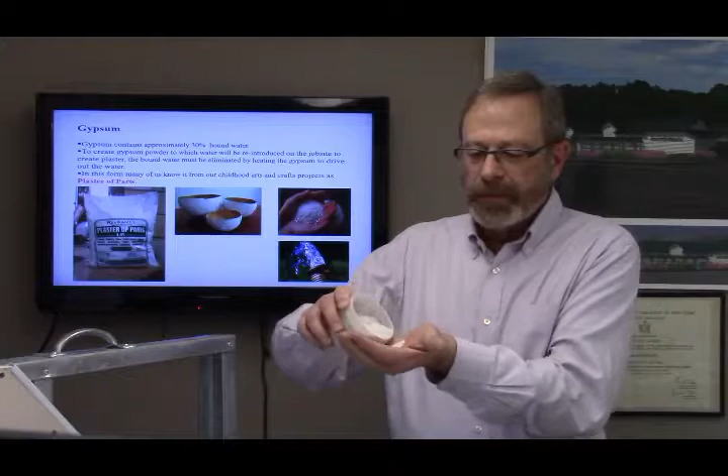Here's a sample of gypsum in its powdered form. We're going to mix that with water in the right proportion for applications on the job. The capacity of gypsum to contain a large amount of bound water is an instance of a material's intrinsic characteristics, as we mentioned in the last module, possessing unique attributes which make it an appropriate material choice to fulfill the needs of a particular construction task.

In the case of gypsum, the capacity to hydrate and dehydrate, that means absorb water and shed water, is gypsum's unique attribute. When gypsum is exposed to fire, the bound water is released as steam. This provides a fire barrier until the water is completely eliminated. After the water is exhausted, the gypsum residue remaining continues to act as an insulating barrier to flames.

This is what makes gypsum an appropriate material choice for partitions. In being the partition, the gypsum is also there as fire protection of the framing within those partitions. Without this protection, structural materials might begin to fail quickly during fire incidents. We will be discussing this idea in a future module on fire safety.

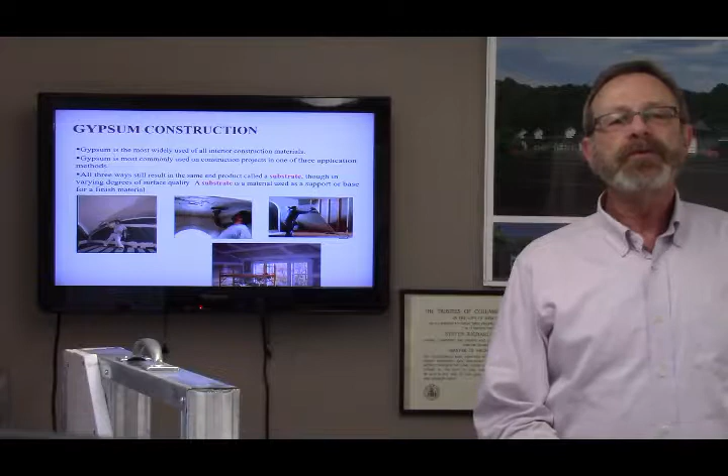As a substrate, gypsum provides not much more than a support for the finish-facing material, be it paint, wall covering, paneling, or the like. Gypsum is available as boards in various thicknesses, sizes, surface finishes, and formulations specifically designed for particular uses. Here we see gypsum in the board form, rectilinear, solid, 4x8 boards, though they do come in different sizes. Because gypsum boards come in thin, flat, wide, and long, the board form of gypsum is most conducive to creating rectilinear spaces and geometrical enclosures, not curving, sinuous, or abstract shapes, though slight curves or bends are possible.

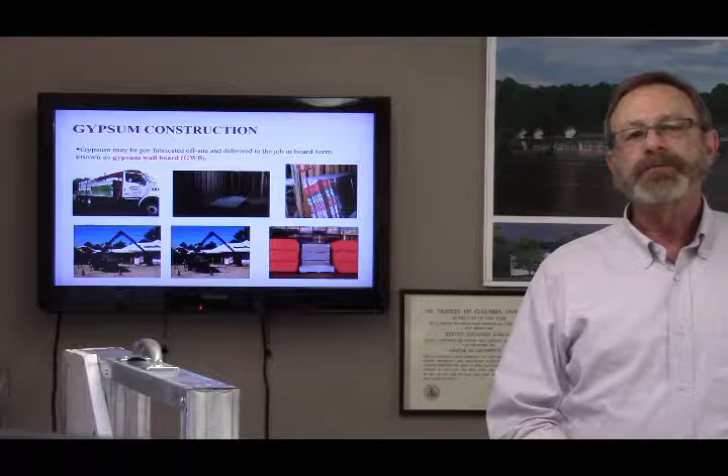Gypsum plaster is the superior substrate for accepting finished materials such as paint. The surface smoothness of the substrate might display through the finished material. I'll explain this thought in more detail in a little while.

Plaster veneer is an alternative to and combination of the full plaster system we just saw and the gypsum wallboard system we've already talked about. Many of the labor and installation expenses of a full plaster system are eliminated, and while the resulting substrate is not as good as that of a full plaster system, it is still superior to a gypsum wallboard finish.

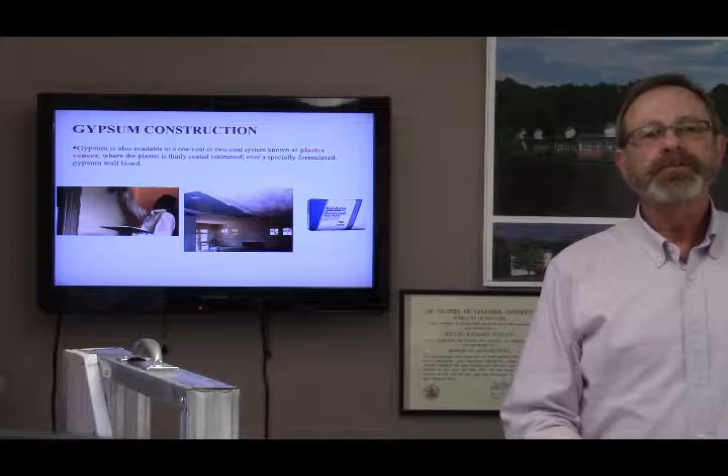Materials comprised of gypsum provide many advantages for use. Gypsum is hard and durable. That means gypsum construction takes abuse pretty well. It is used to create surgical and orthopedic casts.

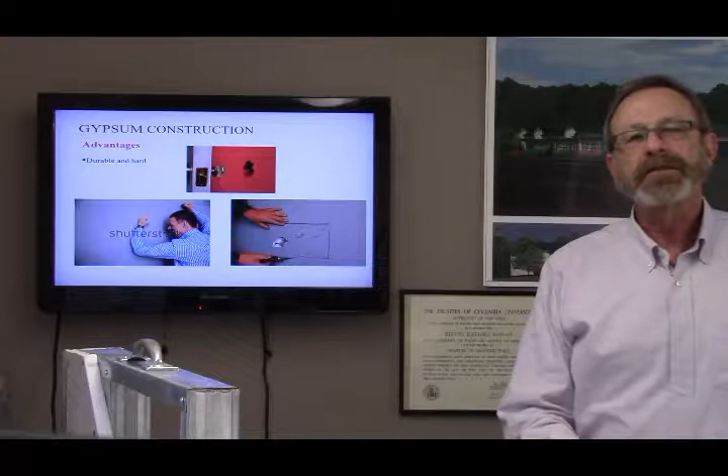In an intimate restaurant, this may not be so welcome, while in an event space, this might be helpful for reaching the back row. Fast installation, that is, gypsum is manageable by a single installer, doing several installation steps simultaneously, or at most, just a few installers for larger pieces.

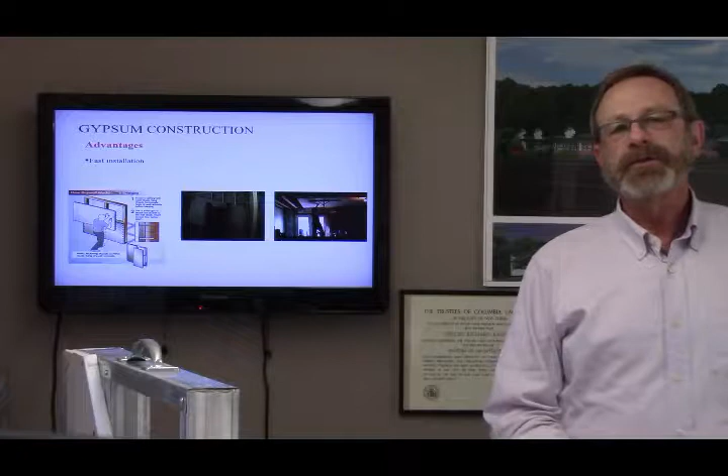And gypsum is easy to repair. Small damage can be easily and quickly repaired with no particular skill set needed. Gypsum is lightweight, again manageable by a single installer or at most just a few installers for larger pieces. Gypsum is inexpensive, especially attractive to tight budgets while providing durability and a more than acceptable appearance.

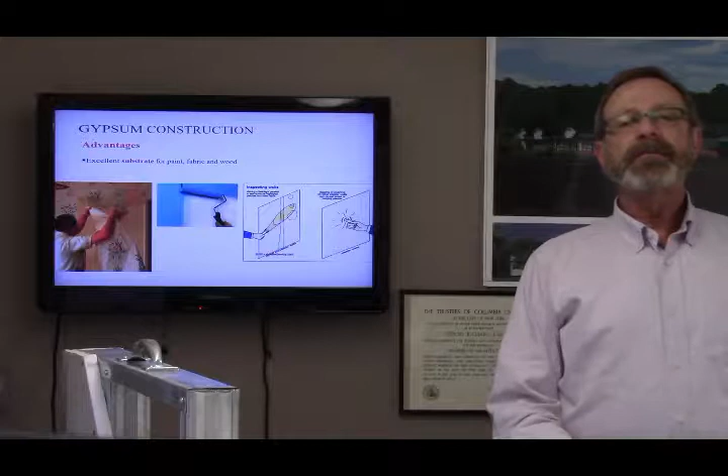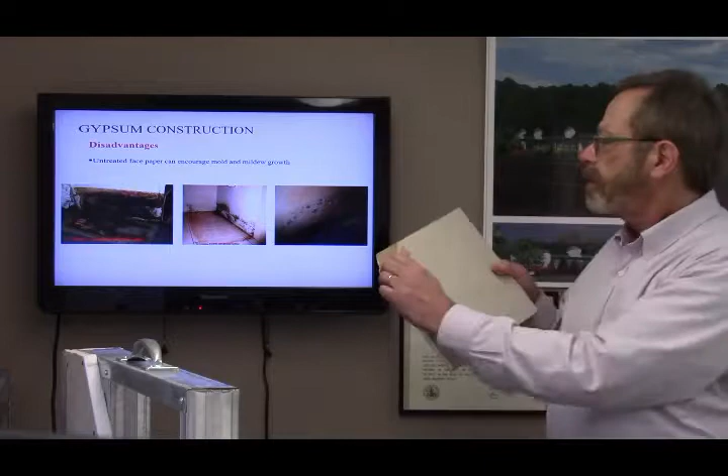Finally, gypsum is an excellent substrate. Its worth as a substrate depends upon the particular performance expected. A material may have those advantages, and it must certainly then well have its disadvantages. So therefore, we can say that gypsum is not resistant to water. It supports mold and mildew growth. The surface paper of the gypsum wallboard - you can see here, there's paper on both sides of the gypsum.

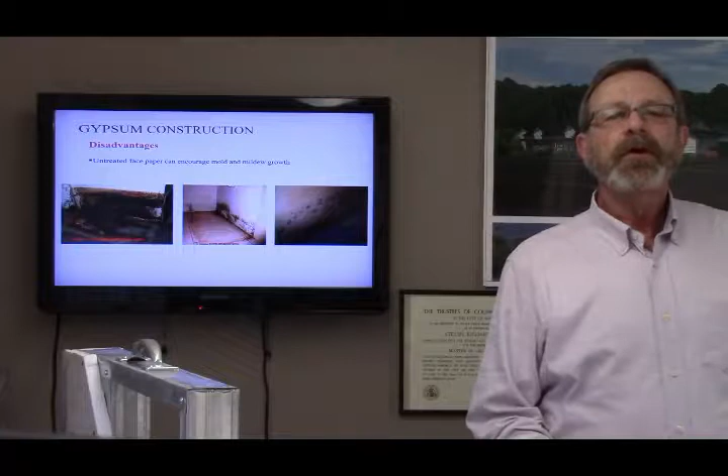The surface paper of gypsum wallboard is available in a variety of types, the choice of which depends upon performance expectations. There are paper finishes which inhibit the growth of mold and mildew in wet applications, finishes which hold gypsum residue in place for increased fire resistance protection, finishes for water repellency, and others.

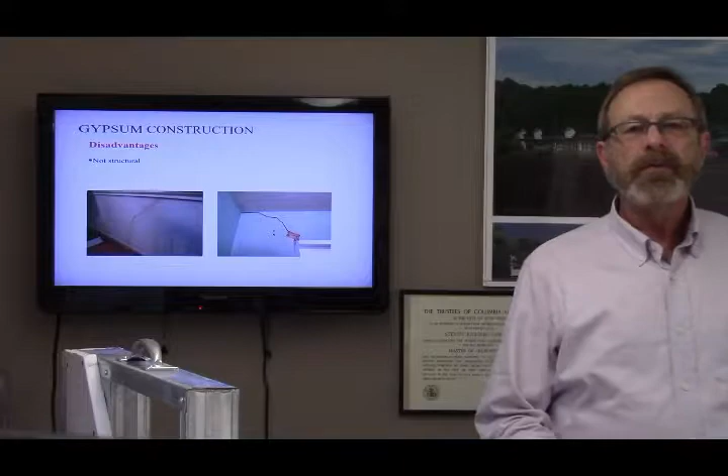Gypsum is hard and durable, which is not to say that gypsum is a structural material. It is not. However, gypsum construction systems do need a supporting framework on which to be mounted, which is what we'll talk about when we discuss metal studs and wood studs.

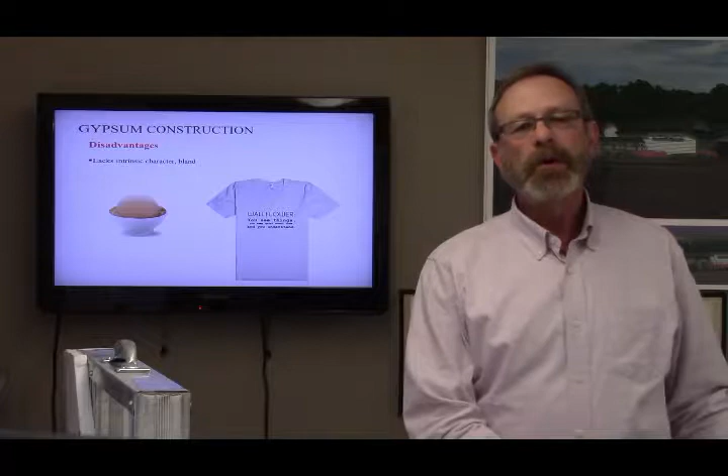Gypsum reflects sound. The hard surface of gypsum promotes sound reflection off of it. This can be an unpleasant consequence which needs to be addressed, or a welcomed consequence which might be exploited. Gypsum lacks intrinsic character; it contributes not more than a surface on which to apply a decorative finish.

There are some benefits to our environment which the use of gypsum as a building component provides. One benefit is that it has little negative impact upon our environment. Gypsum is not a contaminant which harms us or our children. Hopefully it will not be discovered at a later date to harm our children's children.

We are all familiar that there have been useful materials in the recent past which, once thought not harmful, have now been proven to be toxic and carcinogenic, such as lead and asbestos. Gypsum is not poisonous and is used as a primary ingredient in toothpaste.

Gypsum is recyclable. You typically find on a construction site where there's demolition going on that there's a pile for used wood, scrap wood, a pile for scrap metal, and a pile for gypsum. Here's a drywall pile being readied for transport for recycling, to be used again as gypsum board.

I will say that unlike the other materials, metal is a material that you recycle and you can actually get paid for that metal. It's that valuable.

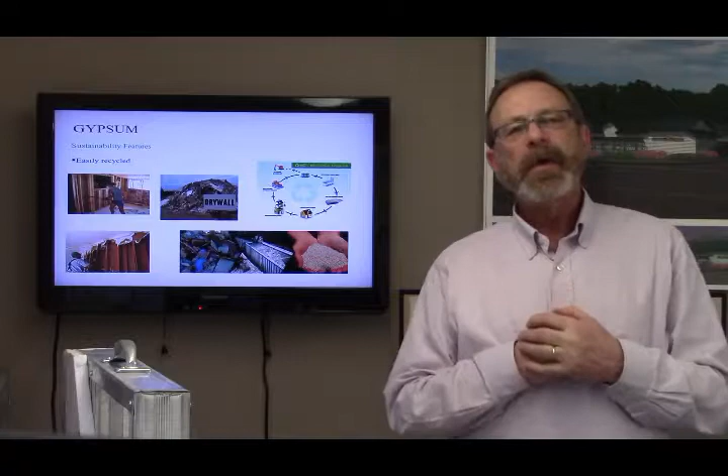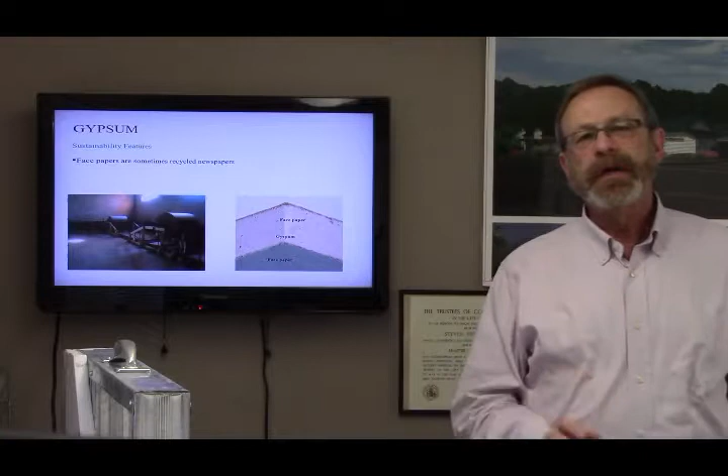The facing paper, which I just showed you, is used on the gypsum surfaces again and is also used for other recycled paper stock, such as newspapers. There is no supply shortage of gypsum currently, and none expected going forward.

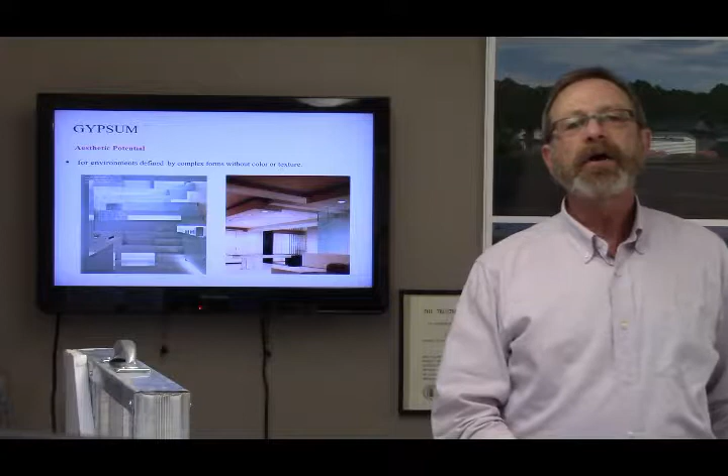I proffered earlier that gypsum lacks intrinsic character, that it is plain vanilla, bland, flat, a background material, a wallflower, just for dressing up. But looking at this slide, and this slide, one could actually argue that its dullness is a good thing, right?

It is a background that can use the planes created from the material as demonstrative of forms and spaces into which our other, perhaps more impactful design features are brought to prominence.

Interior finishes encompass all materials and surfaces that can be seen or touched. The choice of materials and the methods of construction should be based on the function of the space, the anticipated volume of traffic, acoustical effects, fire resistance ratings, aesthetic appearance, and of course many more things.

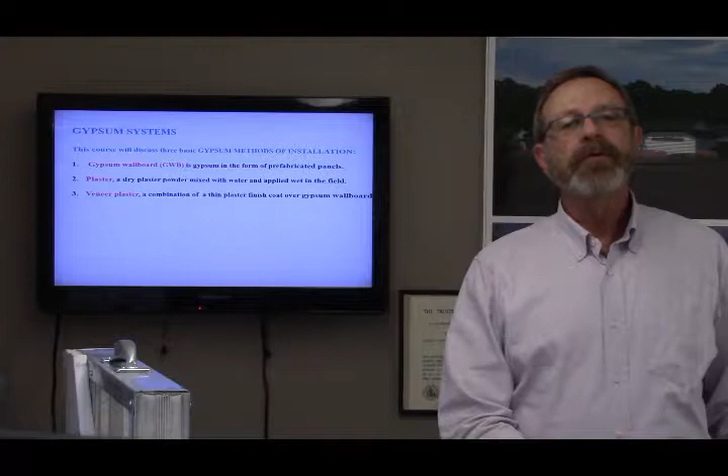The prevalent application of gypsum is as boards, so I'm calling this our first method. Gypsum board is less expensive, requires less labor, less skilled labor, and less time than any other appropriate alternative substrate, were there in fact a comparable substrate on the market.

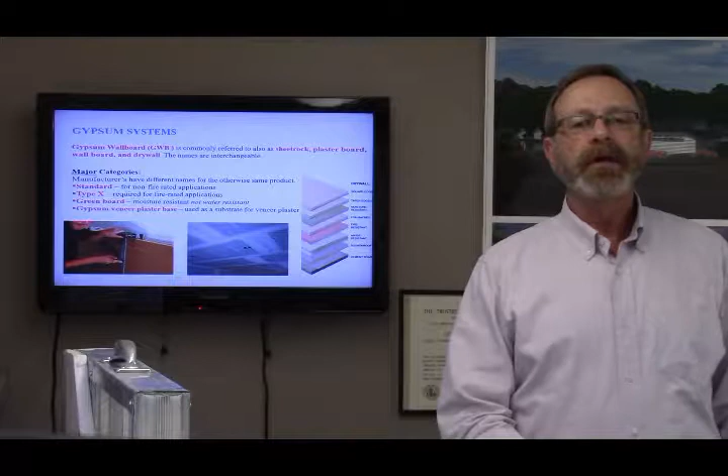In different areas of the United States, the terms drywall, gypsum board, gypsum wallboard, plasterboard, and sheetrock are synonymous with one another. In fact, sheetrock is actually the trademark name of one company's gypsum wallboard product.

We can see from this slide that GWB, gypsum wallboard, comes in different face paper colors. Each color denotes a particular characteristic which makes that particular sheet suitable for an application.

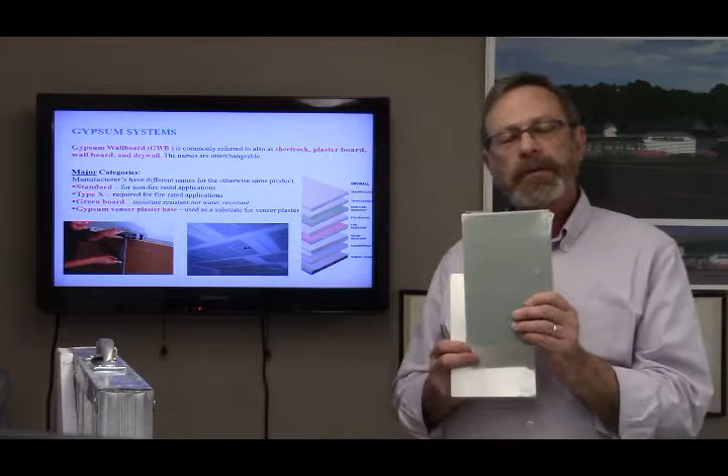So here we have green. This is specified as moisture resistant board, substituted today in most part by something called cementitious backer board, which is a cement type board used now more prevalently in wet or moist locations.

The white is just a standard piece of gypsum board. We'll be talking about some of the particularities of the other colors as well going forward.

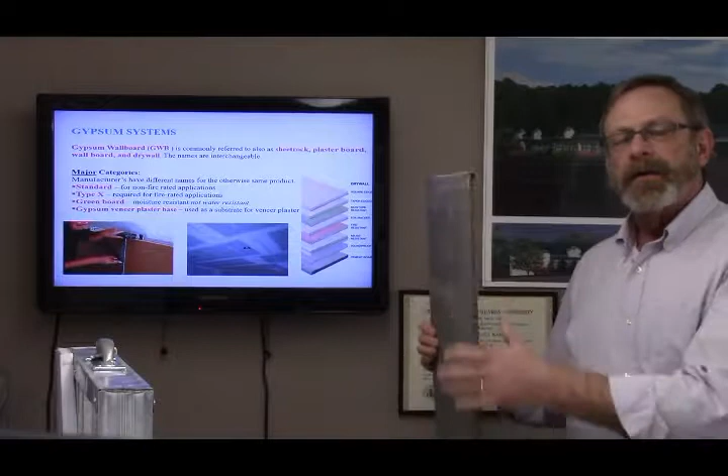This is a sample off the job of cementitious backer unit, CBU. You can see it's concrete or lightweight concrete with fiber mesh to hold it together. It's much more impervious to water and moisture than even the best moisture resistant gypsum wallboard.

It's used in areas primarily where you have showers or bathrooms and are going to be applying tile to the face. Also called Durock or Wonderboard.

Sheets are normally 4 feet wide and 8 feet long, but they are available commonly in lengths up to 16 feet. Gypsum wallboard sheets are available in increments from 1/4 of an inch up to 1 inch, with 1/2 inch, 5/8 inch, and 3/4 inch being the most popularly specified.

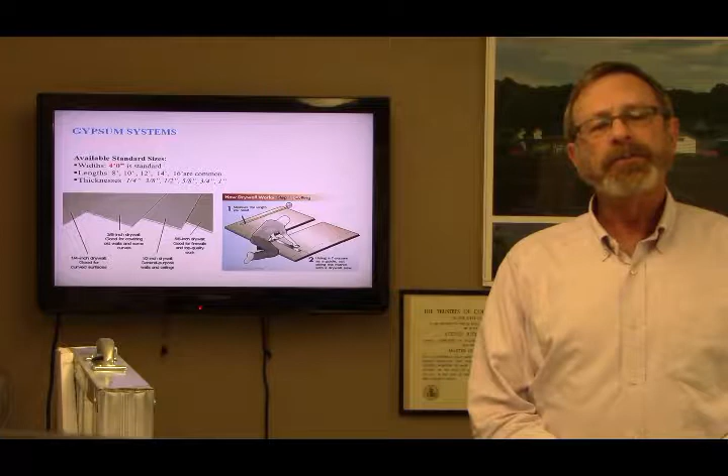The thickness of the GWB that you will specify for your projects will depend upon the task it's meant to serve, whether it be for fire rating or sound attenuation, or just using a thin sheet to cover some irregularities on a former partition.

The larger the sheets, the fewer joints there will be once installed, and the reverse is also true. The smaller the sheets, the more joints there will be once installed. Each exposed joint between wallboard pieces will need to be concealed and finished. So ask yourself this: is it more efficient, productive, and result in higher quality to use larger boards or smaller

boards? Large boards require 2 or 3 workers to install, but will have fewer joints for finishing, which in turn will result in a more perfect surface finish upon which to apply the paint. Smaller boards require 1 worker to install, but will have many more joints for finishing, which in turn will most likely result in a larger number of surface imperfections over which to apply the paint. Think about this conundrum while we discuss the actual methodology for gypsum wallboard installation.

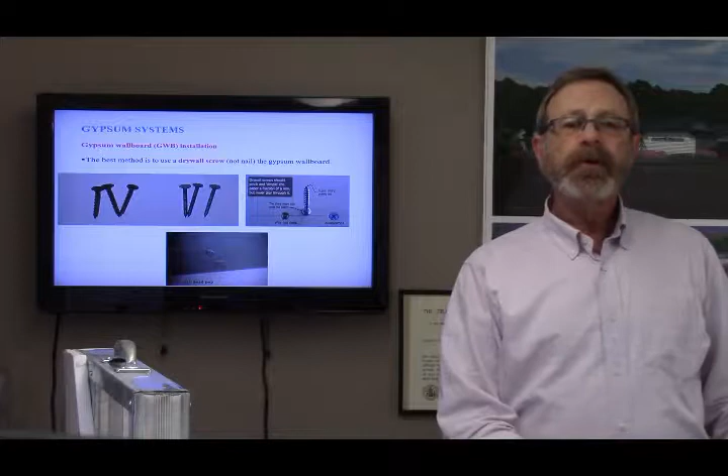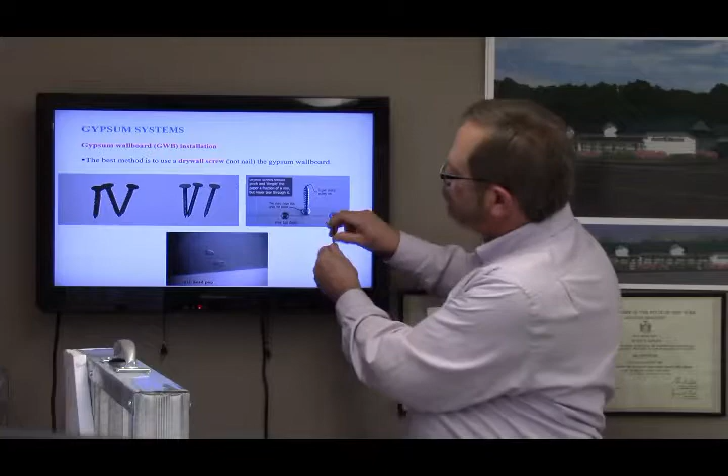The installer, referred to on the job as the sheet rocker or rocker, uses screws, not nails, when installing the gypsum wallboard. It is the threaded shaft which makes the difference. Let me show you an example of some sheetrock screws. Hopefully you can see that these are threaded. They create more friction to hold the material better to the wall structure behind the gypsum.

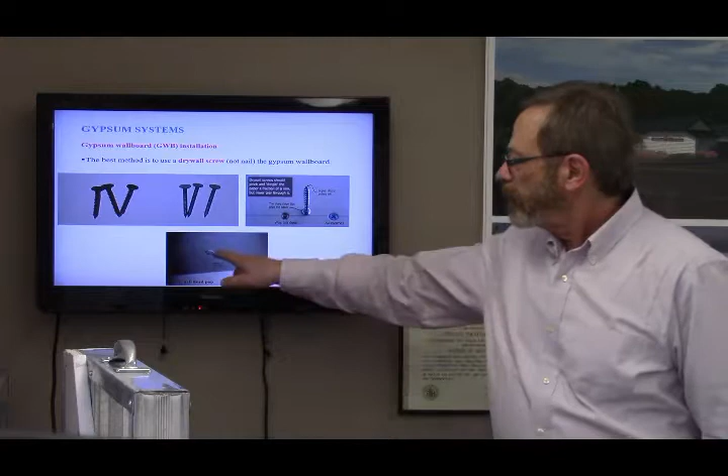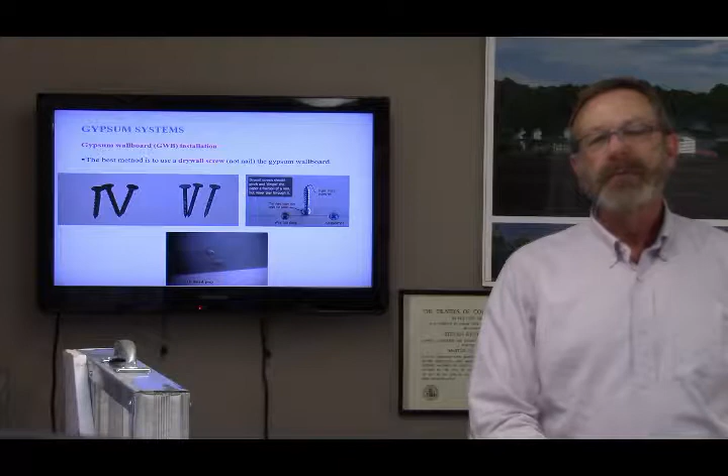Nails, on the other hand, are smooth shafts without that added threaded resistance, so they could pull out much quicker and more easily, or the screw is less likely to become loose and back its way out than a nail with a smooth shank. Here you can see a nail pop. These are screw holes, somewhat recessed, that will then be covered with a material for finishing. So specify screws, and if you see nails being installed, stop the job and settle the issue. The client's best interest is your responsibility.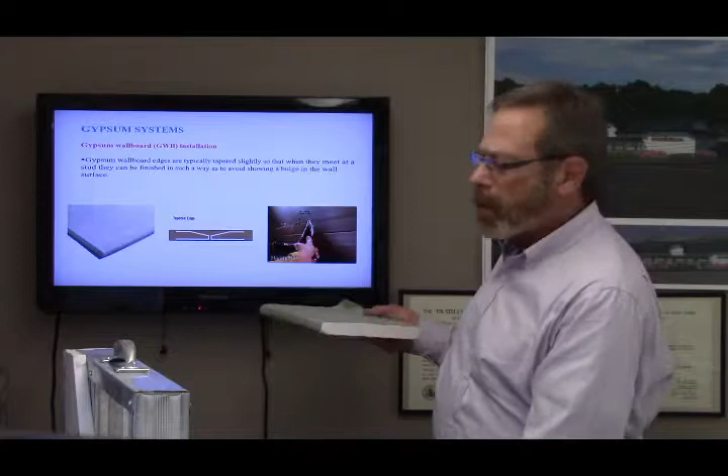The long edges of wallboard are typically, though not exclusively, supplied tapered with a beveled edge. The taper width is about 2 inches. You can see in this slide, and hopefully in these examples, that when you butt up 2 pieces of gypsum wallboard, there's an area adjoining the joint that is somewhat depressed. Into that area will be the filler or the spackle and a piece of tape that will close that off and make it smooth between the adjacent boards.

This tapering at the long edges allows for the tape and joint treatment to be applied, resulting in a finish that should be flat, smooth, and monolithic. I emphasize should because a good taper spackler can make even a poorly done installation job look fine. Always insist upon the best taper spackler for this stage of your construction project.

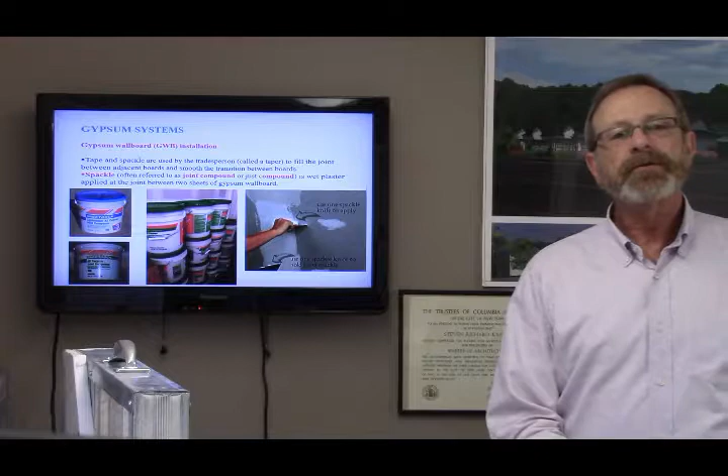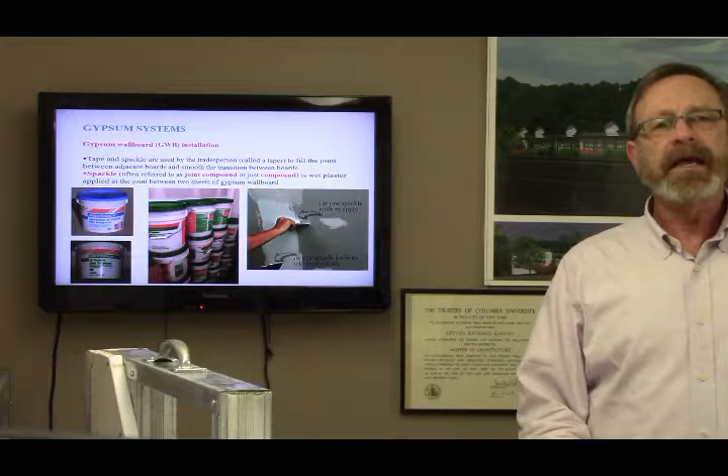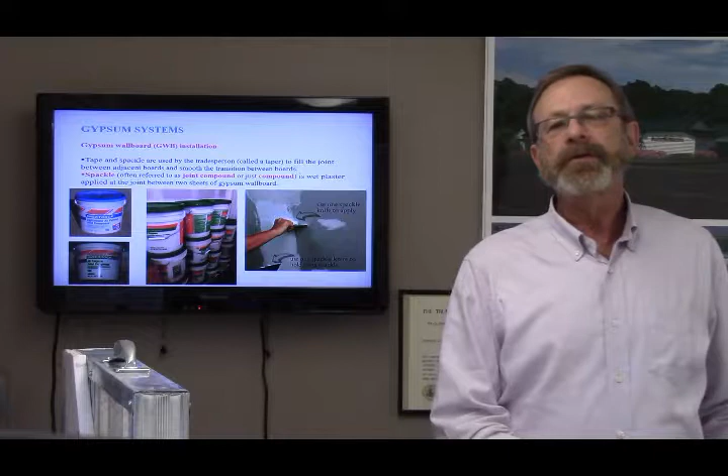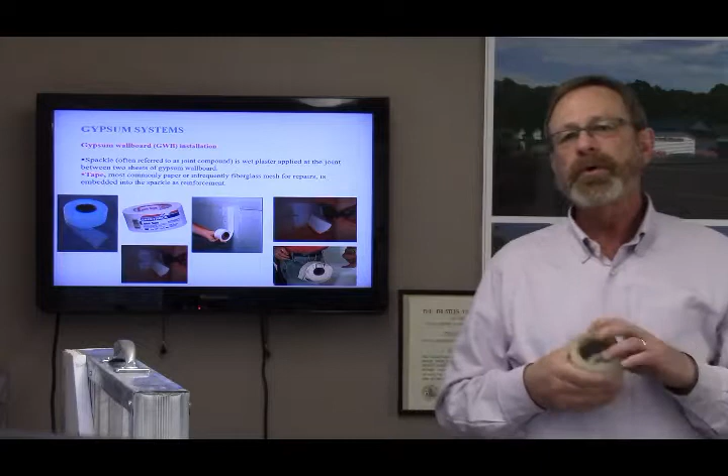lid, amongst other types. The tape part of tape and spackle comes only in either fiberglass mesh form or paper form. This is a sample of the mesh form. It's got a slight adhesive on one side and so can be self-supporting for a short while. This mesh type is reserved primarily for small repairs because of its inferior stability. Paper tape is the most common for all other uses. Both come in rolls, as you see.

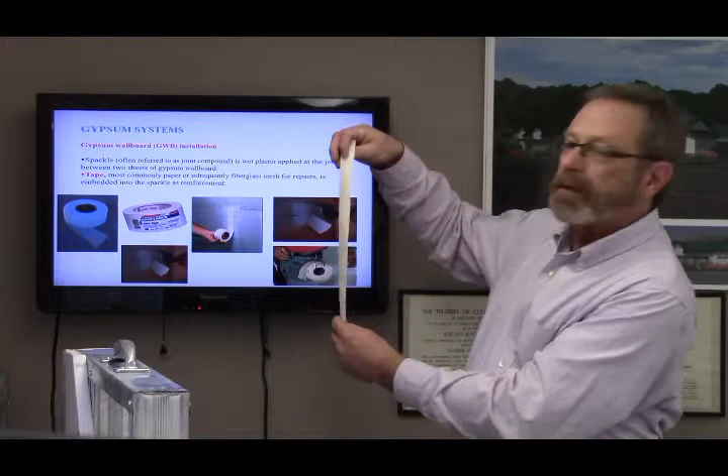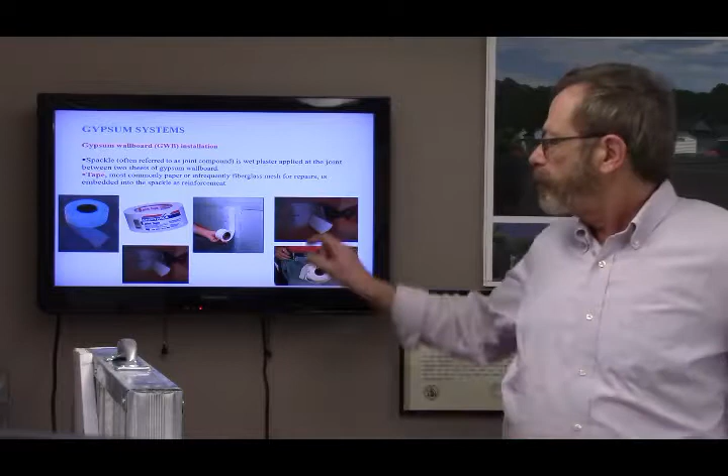Paper tape has a crease down its center, which can be folded to easily place the tape into a corner. There's a crease in the center. You could just fold it like that and have it ready to put into a 90-degree corner. A first application of compound, or as I said, mud or spackle, is typically applied to all joints using a wide 5-inch spackle knife. The knife will cover the 2-inch spacing of the feathered edge of each adjoining board.

The tape is then placed to cover the joint and is pressed into the mud. Another layer of compound is applied, feathering the outer edges. After drying, the compound is sanded and a third coat is applied, with the feathering extending beyond the previous coats. All screw holes are also filled with joint compound and sanded smooth as well. Sanding should be limited only to the area that has been coated with compound, because sanding the paper layer will result in a roughness that may be visible through a paint finish.

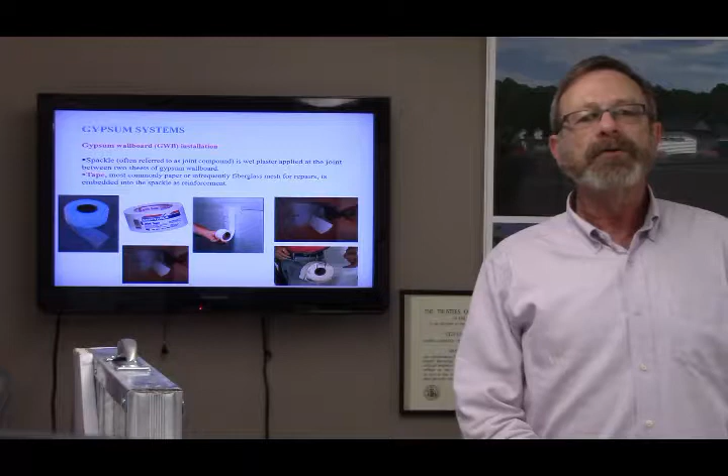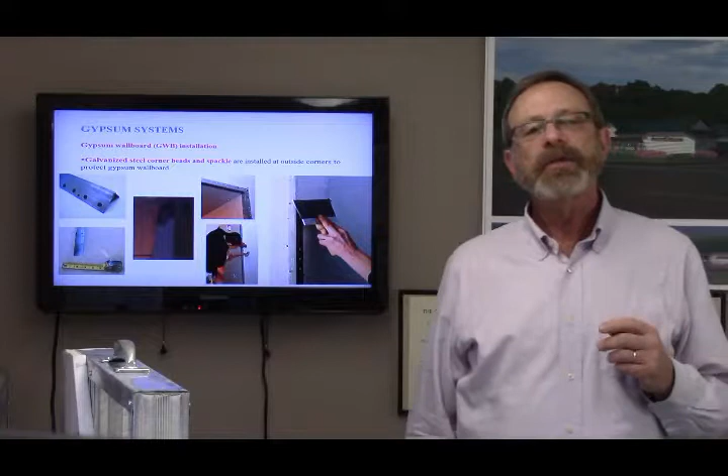The appearance of these rough surfaces blemished by sanding, in contrast alongside the normal paper finish surface, is what many observers find objectionable once the paint is dried. And then it's too late. Due to the vulnerability of outside corners to damage by human activity, there is a reinforcement available to install which protects and delineates a crisp 90-degree edge at the meeting of 2 pieces of wallboard.

This accessory is called a corner bead. Here's a sample of a corner bead. I can also show you on this sample of a partition, metal stud partition, the introduction of the corner bead. Corner beads are fabricated to accept compound into a dimple which when properly feathered and spackled will align to the planes of the adjacent wallboard surfaces.

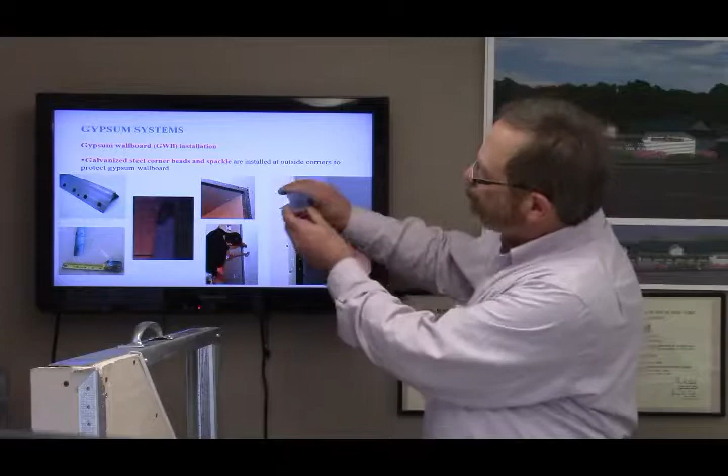Perhaps you can see a slight dimple right along that line that will accept a little more thickness of spackle, which can be then feathered down to the adjacent edge. Corner beads come in 8-foot and 10-foot lengths and are installed end-to-end for long runs.

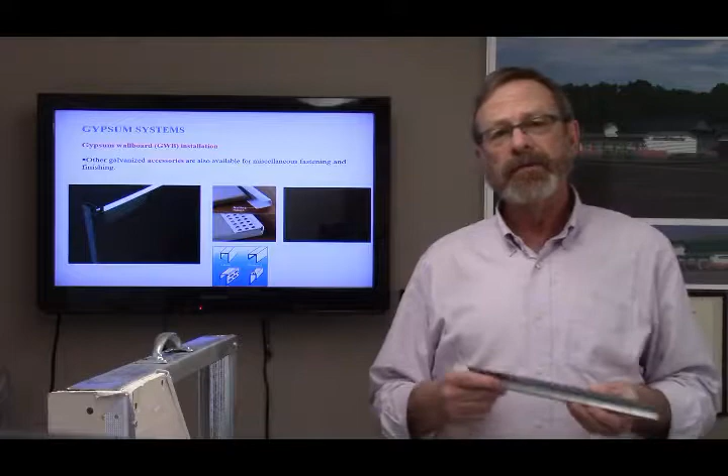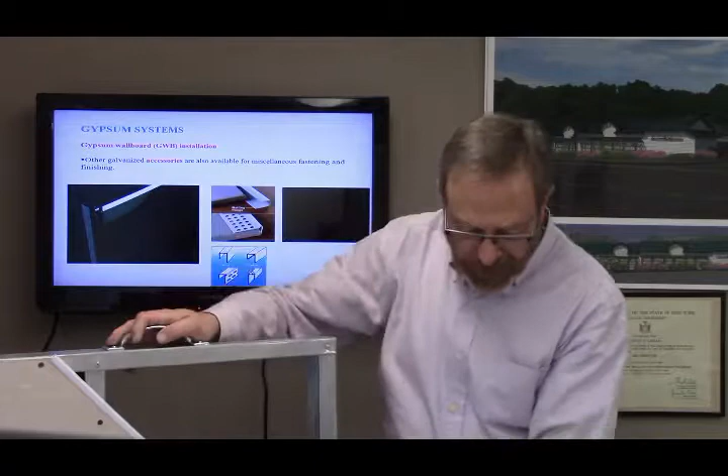Other accessories, such as J beads, named because of their similarity to the letter J, exist for common drywall to drywall intersections, or where drywall intersects with a dissimilar material. Here's an example of a white J bead. It's finishing off this portion of wallboard in a nice, neat way because perhaps it's adjoining a dissimilar material and there's really no way to finish the edges. So you would have the gypsum board with the J-bead up against the piece of wood, and it looks good.

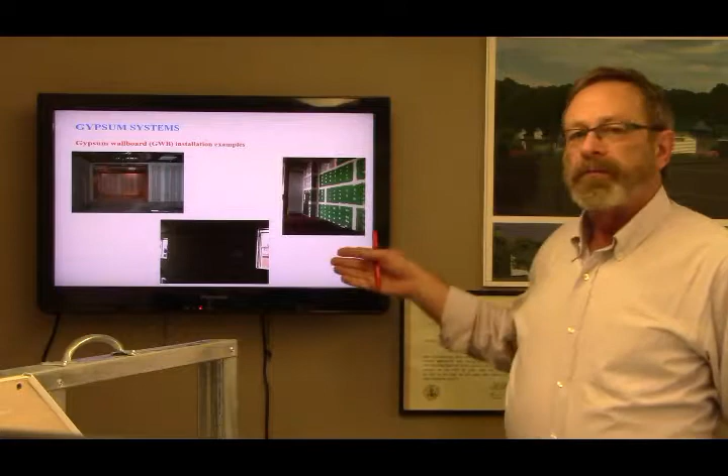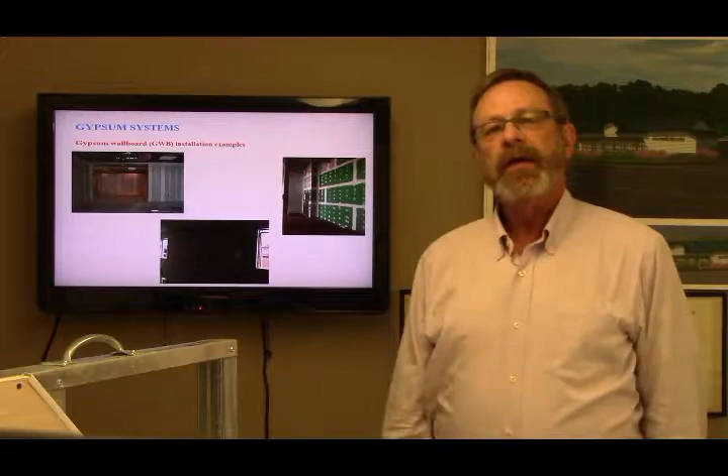So here's a view of what we call paint-ready gypsum wallboard partition. The next step here is just to paint the wall. The spackler has come in, done his spackling and sanded the job to perfection, and the painter simply needs to come in and start coating with the primer as a base coat for his paint.

The painter first needs to accept the job from the sheetrock installer and from the spackler, because he then takes responsibility for the quality of the finished coat that he's applying to the substrate. So sometimes the painter will come in and find things that he doesn't like and either fix them himself to his satisfaction, or he may ask the client to have the sheetrock or taper come back and finish the job a little better for his own standards.

So here we can see different types of application of spackle. Here someone just came through and very efficiently, where the boards join, swiped with his spackle knife, a quick smooth stroke, and does the same with where the screw holes are, and he never lifts his knife very far off the board. It's a very smooth operation.

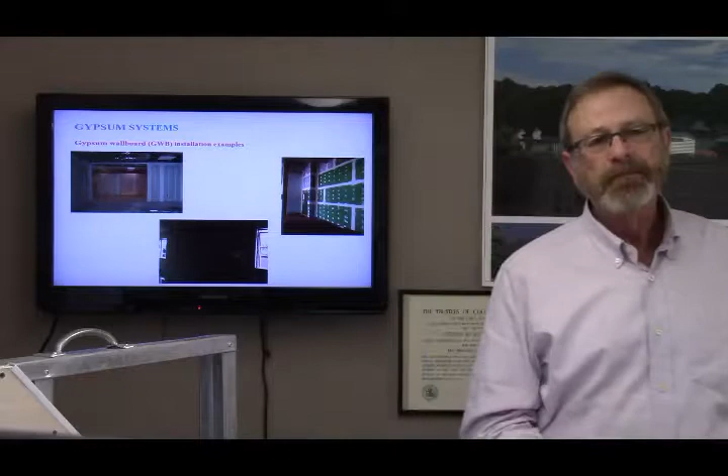This gentleman did, I'm sure, an equally good job, but you can see that he treated each hole independently. Probably took him a little more time. Perhaps wasn't quite as skilled as the other gentleman over here. So now let's continue on to what I'm calling our second method. Our second method is a gypsum system called plastering.

The plastering system dates back to ancient Egypt and Greece, when intertwined reeds were used as backing to accept the wet plaster. As I said, gypsum wallboard is constrained to planar shapes for the most part. So a case could be made that without the constraints of the board form, wet plaster applied properly in a liquid state and allowed to cure into a dry state can outperform the wallboard form of gypsum.

But does the superior performance of a wet plaster application warrant the associated higher material and labor costs? Is the effort worth the expense? This is a discussion between designer and client. As designer, you need to understand the issue in order to raise the question. For many high-end residential, corporate, and governmental projects, quality, longevity, and facility upkeep outweigh immediate cost consideration. On smaller projects, maybe cost considerations will dictate final choices.

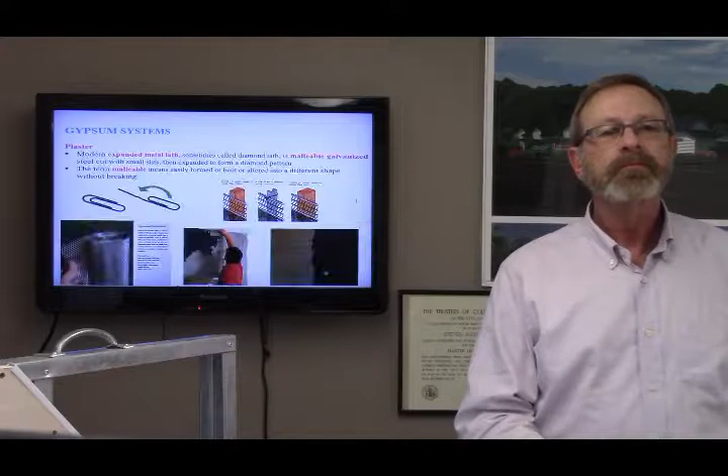I said that the Egyptians used intertwined reeds as a backing material for their early form of plaster. The backing material which forms the frame upon which the plaster will dry is called lath. Half-timbered homes of the English Tudor style use lath of saplings and reeds. So technology advanced from reeds to wood, and from wood to metal mesh, and from metal mesh to non-rusting metal mesh.

The distinction between rusting and non-rusting is important because plaster, as we discussed earlier, will rehydrate, meaning that it is porous and will accept water when exposed to it. If the plaster is subjected to humidity or moisture, the metal lath on which the plaster rests can rust and the plaster loosen and fall away.

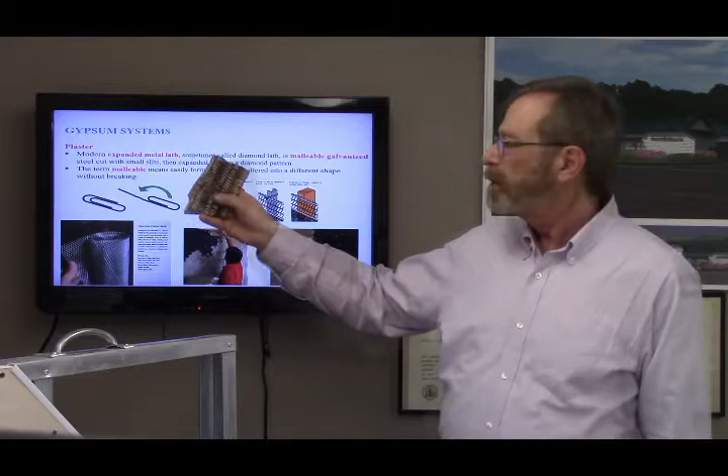I have here a sample of plaster on lath, and that lath was not galvanized or made rust resistant, and on this piece the lath corroded and fell to the ground, and that's how it ended up in my hands. Today we prefer to use the galvanized metal lath.

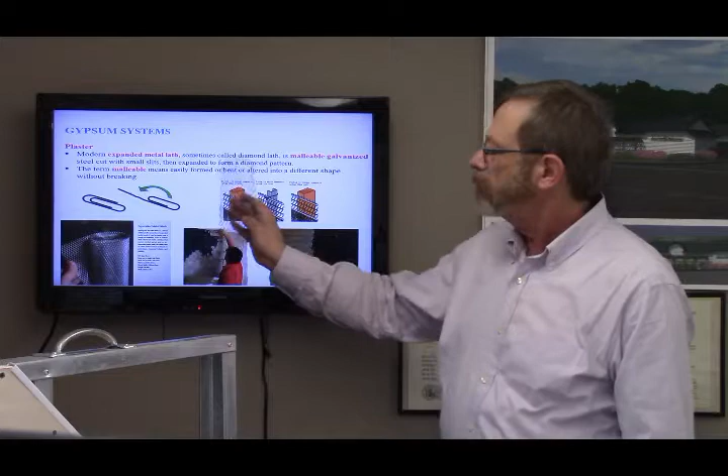Here's two pieces. We call this expanded metal lath, and it's malleable and galvanized. Malleable meaning bendable, just like a paper clip. Galvanizing protects iron and steel against corrosion and the eventual failure of the material to function as intended and needed. The galvanizing process is a process whereby zinc is applied to the surface of the material.

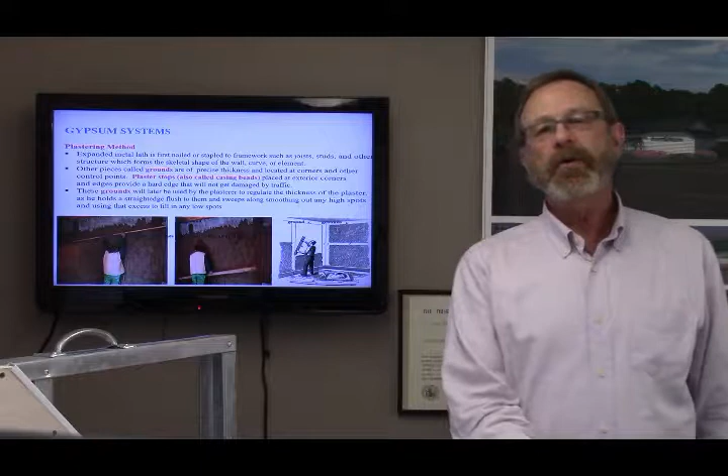The full plaster method is the process whereby gypsum material is strategically layered, one layer upon another, each layer accomplishing a particular prerequisite of the layer to follow, until a cohesive whole assembly is formed. This slide describes that layering process.

Upon a framework of lath, a scratch coat is troweled on; some plaster is squeezed through the mesh to form a mechanical bond, a key. The coat is left rough to provide tooth. Hope you can see here the lath, in this case wood, and the first coat of plaster, called the scratch coat, is squeezed into that lath and allowed to dry.

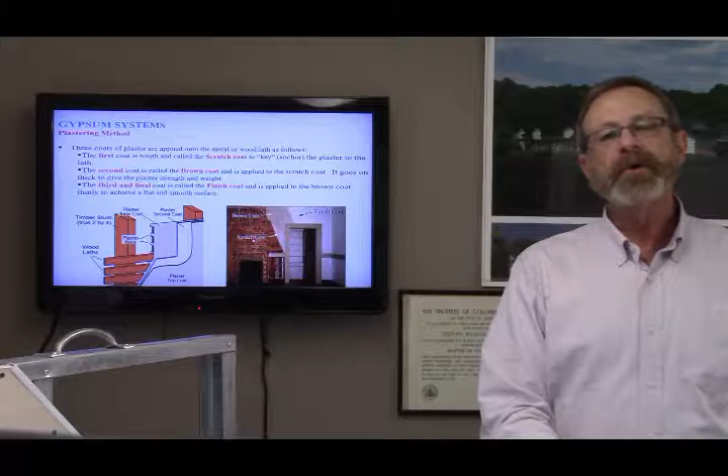The brown coat is applied next and gives bulk to the wall. It is also left rough to provide tooth. The finish coat is applied thinly and smoothly to provide as nearly a perfect substrate as is achievable. Take a moment to look closely at the vertical wall section detail in this slide. Find the grounds.

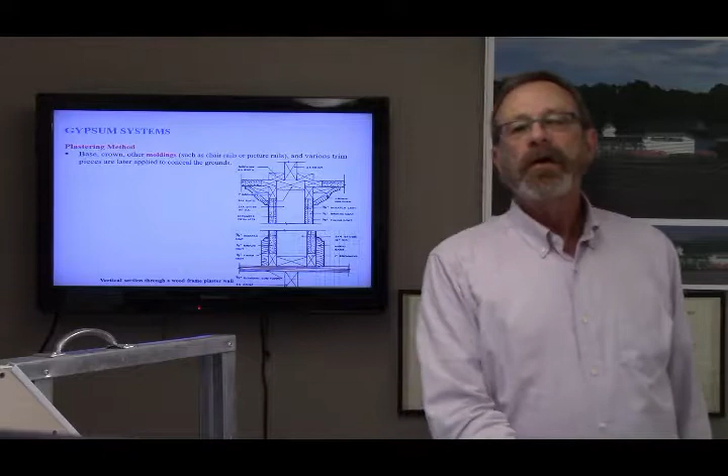Then imagine holding a long straight edge flush against two opposing grounds, say one at the floor and the other at the ceiling. Imagine now pulling that straight edge parallel to the wall surface, maintaining contact with the two grounds. You can understand that the wet plaster is made smooth in this way, leveling high areas and using the excess to fill in low areas.

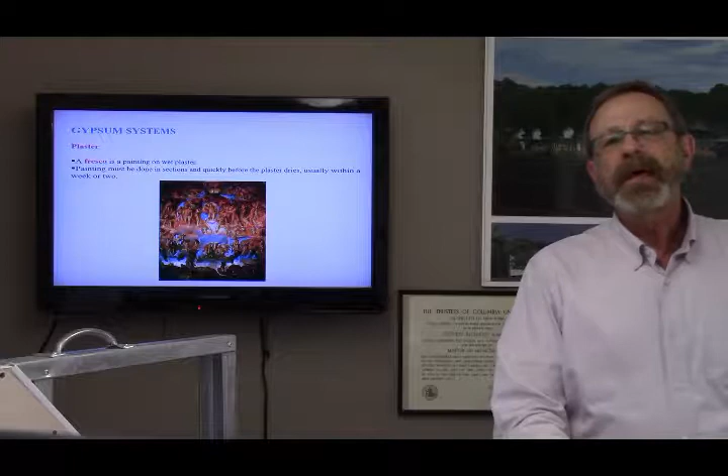Frescoes were painted on wet plaster, which absorbed the pigment so it dried as an integral part of the plaster. Since the artist could only paint an area where the plaster was still wet, the amount of progress the artist could make was painstakingly slow. Now let's continue on to what I'm calling our third method.

A veneer is a thin layer of a material applied to a substrate for dimensional stability. Veneer plaster over gypsum lath refers to a gypsum plaster board which predates but acts similar to present-day gypsum wallboard as a substrate. Gypsum lath is a panel having a core of dense hardened gypsum plaster. It is faced with fibrous, absorbent paper to which plaster adheres.

Gypsum lath was originally made in sheets 16 inches by 48 inches, but currently is available 2 feet by 8 feet. It has a pattern of holes per sheet to accept the plaster key. Gypsum plaster is applied over the gypsum lath as a monolithic base coat, followed by a thin finish coat, creating a complete plaster cladding. Joints, angles, and fasteners do not need to be taped or spackled.

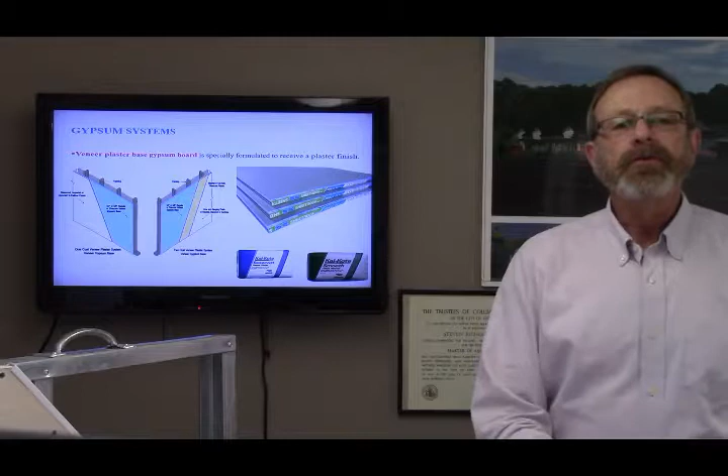Veneer plaster over gypsum wallboard starts first with a factory finished gypsum powder ready to be mixed with water on the job site. The mix is applied as a very thin 1 or 2 coat finish over types of gypsum wallboard specially formulated with face paper having a surface which is highly absorptive. In the case of veneer plaster base gypsum board, the joints, angles, and fasteners do first need to be taped and spackled. A veneer plaster system can offer economy and efficiency with a minimum of sacrifice to substrate surface smoothness.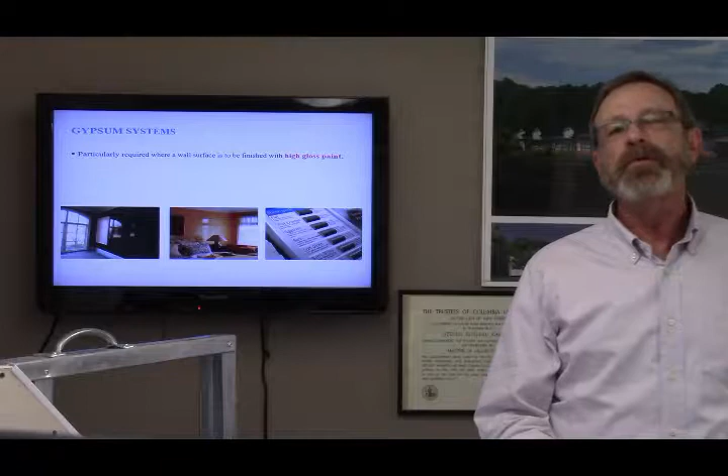As designers, we need to understand what level of substrate satisfaction the client expects for their budgetary constraints. It is essential to understand what the surface finish will be. Does the client expect, for instance, to be using a high-gloss paint? On one end of the spectrum are high-gloss paints which show all the surface substrate imperfections, and at the other end of the spectrum are flat paints which will show imperfections the least.

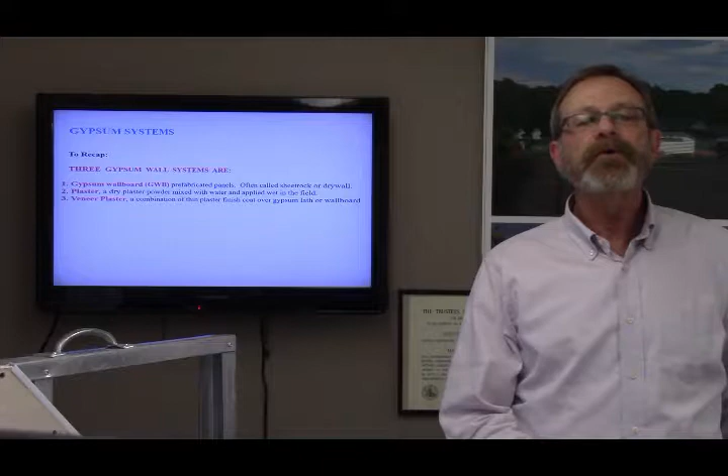To recap, there are 3 gypsum wall systems: gypsum wallboard, GWB, prefabricated panels, often called sheetrock or drywall. Plaster, a dry plaster powder mixed with water and applied wet in the field. And 3, veneer plaster, a combination of thin plaster finish coat over gypsum lath or wallboard. Now some other relevant information to gypsum.

Buildings are constantly moving because of changes in temperature and humidity, because of wind, because of vibrations caused by equipment and the vibration and movement of people. The movement is very slight but can cause groaning structures. We've all been in guest houses or strange places where when we're sleeping we think we hear noises. Well, we do hear noises, and those probably are the noises of the building moving.

Those movements, besides being manifest in the sounds that we hear, are often visible in different cracking areas. We often have cracking where the ceilings and the walls meet. Well, crown moldings were invented to cover the areas of this vulnerability. I have some samples of crown molding. I hope you all know what that is. It refers to a material that's going to cover the intersection of the wall meeting the ceiling. Crown moldings have the added benefit of contributing to the overall interest of a room by creating dimensionality and shadow lines. Crown moldings are available in a variety of sizes, profiles, costs, and material composition.

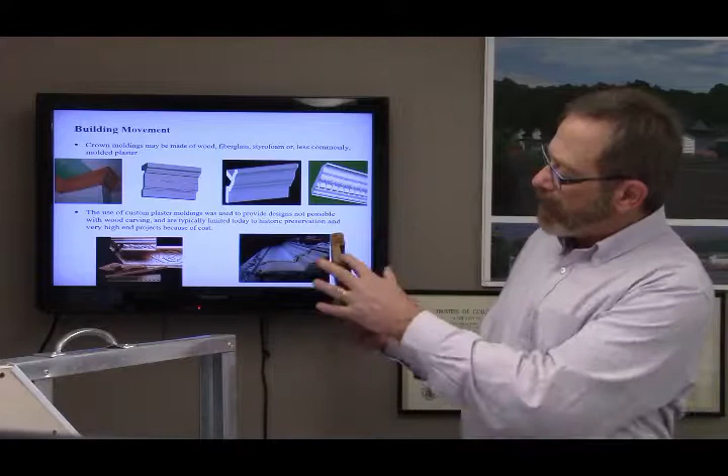Here I have a sample of a wood molding. You can see it's made up of several different sections or profiles to be mixed and matched at your pleasure, whatever profile you could invent and have made. You can create your own cornice.

We also have the older style of cornice, cast in a mold. This is plaster, reinforced in the back with some meshing and some wood.

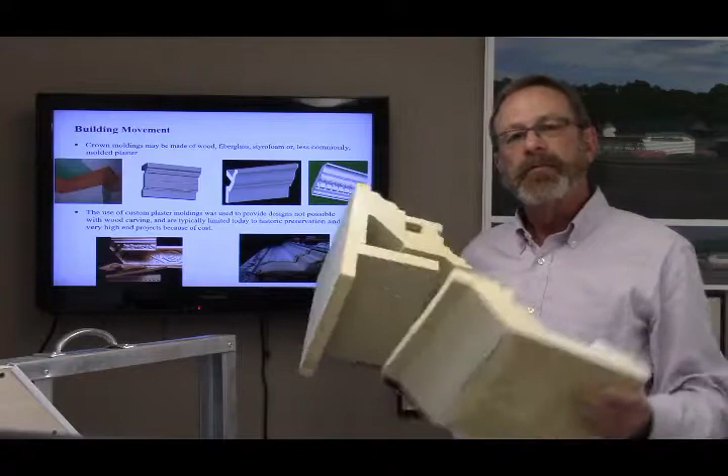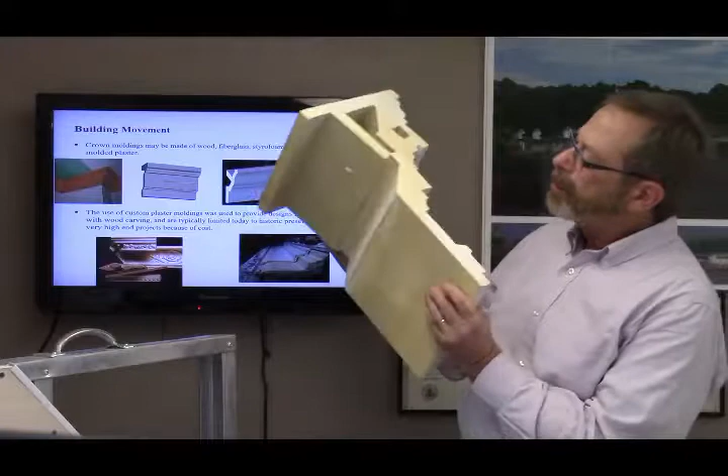And nowadays we also have a type of crown molding made out of a styrofoam material, and you can create and assemble pieces of all sizes, and it doesn't become heavy. You can actually lift it right up into place, probably with 1 or 2 people, and it's not attached with a mechanical fastener, although it could be. It's generally glued.

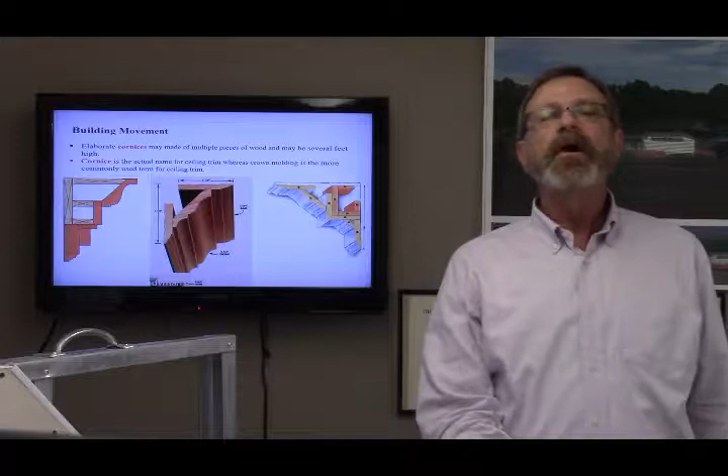The terms cornice and crown molding are often used interchangeably. I've heard it said that a cornice height should be equal to 1/10 of the floor to ceiling height of the room. In the absence of crown moldings, the intersection of wall and ceiling is finished by a typical corner application of paper tape and spackle.

Floor and wall intersection is another place requiring additional detailing by the designer. This area is in constant need of maintenance because of its proximity to our daily activities. It is an area prone to abuse and needs to be protected and fortified. The covering used is referred to as base or wall base, as it covers the base of the wall. The choice of wall base material depends upon expected performance and longevity, flammability considerations, and sometimes just plain personal taste.

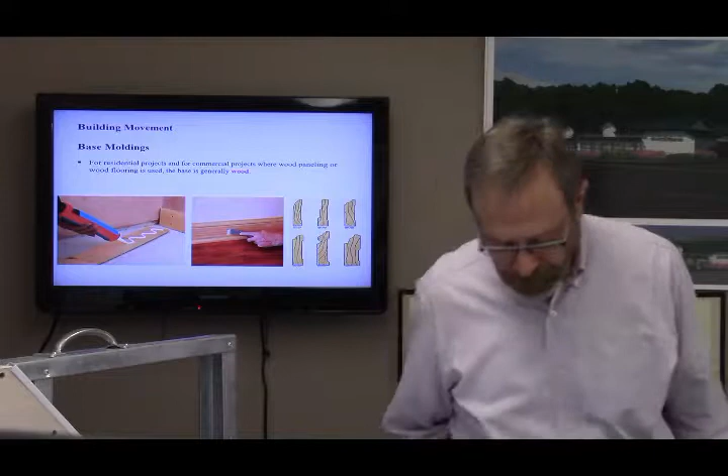Here's a beautiful piece of floor base, more expensive than the typical clam shell base, which is the most common. And you would be given this by your contractor for your job if you haven't specified what you really wanted. And of course, it'll be an upgrade and an added expense to your client. So we always specify to the hilt everything that we know the client wants and the type and style and cost level of what it is they wish.

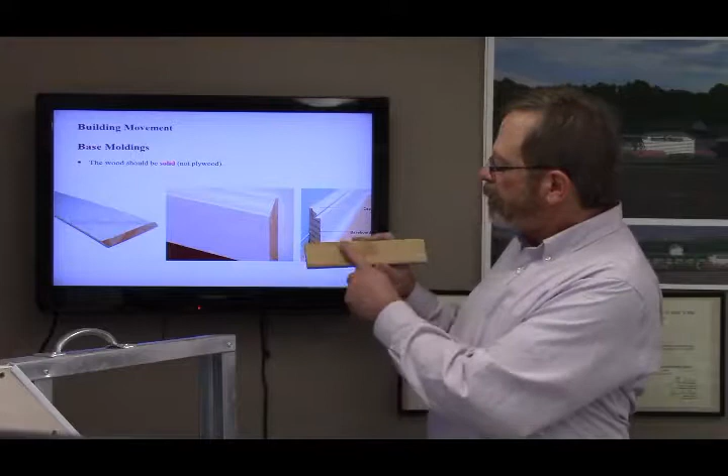A piece of solid wood as wood base is optimal, as opposed to wood composite materials which may be absorptive and expand or otherwise react poorly. Here we see a solid piece of wood. This too is a solid piece of wood. Perhaps you can see this is not a solid piece of wood. There's a joint intersection here, and that's called a finger joint.

The cost of wood base can be a budgetary concern, so it's important to know what finish the base is expected to receive, as finger joint is much less expensive than clear. Here you can clearly see the finger jointing. This is where you would use that less expensive wood because you knew you were going to be painting it. You wouldn't want to use that if you knew you were going to be staining or have a clear finish. You'd want a piece of solid wood that was clear.

While the particular profile and height of the base is of budgetary concern, generally base is chosen for the aesthetic contribution to the overall room design. After all, some simple base will need to be used, so there is already a minimum expense involved. How much more will a more appealing base cost?

The term base can refer to both resilient base and wood base. Resilient base is pliable, easily conforms to most curves, generally easy to install, and relatively inexpensive. Rubber base is more expensive than vinyl base. Resilient base is available in a very wide range of color choices to match most any wall or floor finish color.

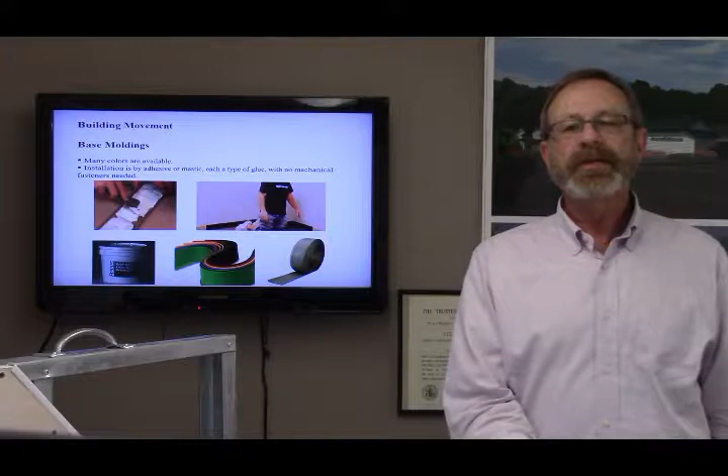Here's a small sample of wall base. You see it's flexible. The color choices are many. The application is by adhesive to the back of the base and pressed against the wall. Some base has a strip of adhesive tape on the back installed at the factory. This adhesive tape is not as strong as the adhesive, also referred to as mastic, available for field application.

Resilient base is available in two profiles: straight for use with carpet. Here you can see straight base with the carpet either butting up against it or the base sitting on top of it, and cove for use with other types of flooring. This is the cove base. There's a little flange projecting out. We call that cove or sanitary base. It's given that name because it's much easier to clean that little cove, the floor intersection, and keep it sanitary than it is to clean the previous straight base, which gives you a 90-degree angle where dirt could hide out.

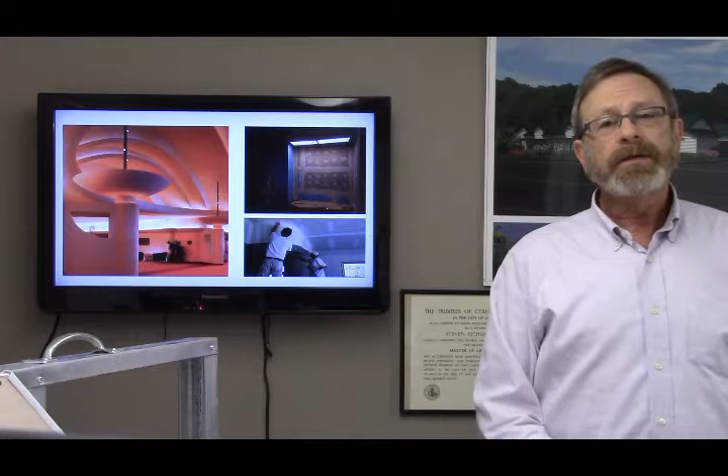In summary, the surface of the substrate created by the different types of gypsum application methods vary. Which is the right application for your client's project? Thank you.